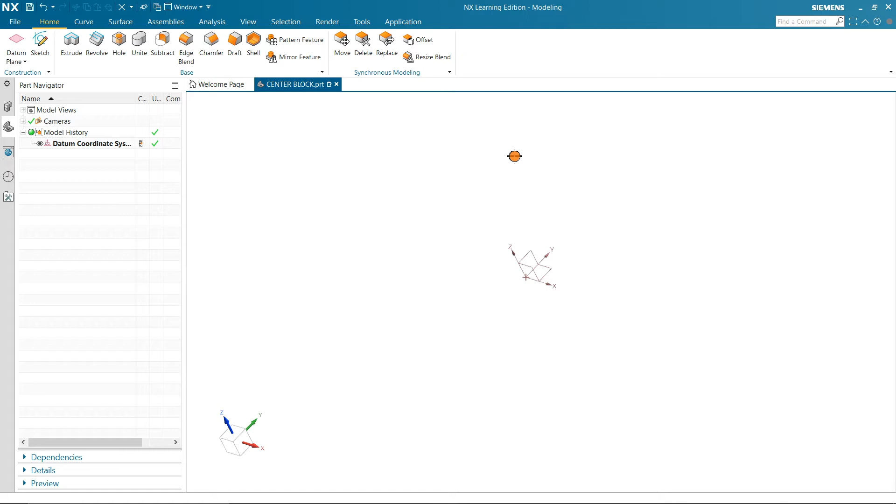Without delay, let's start sketching the center block. Here the dimensions given were 20 mm and 30 mm.

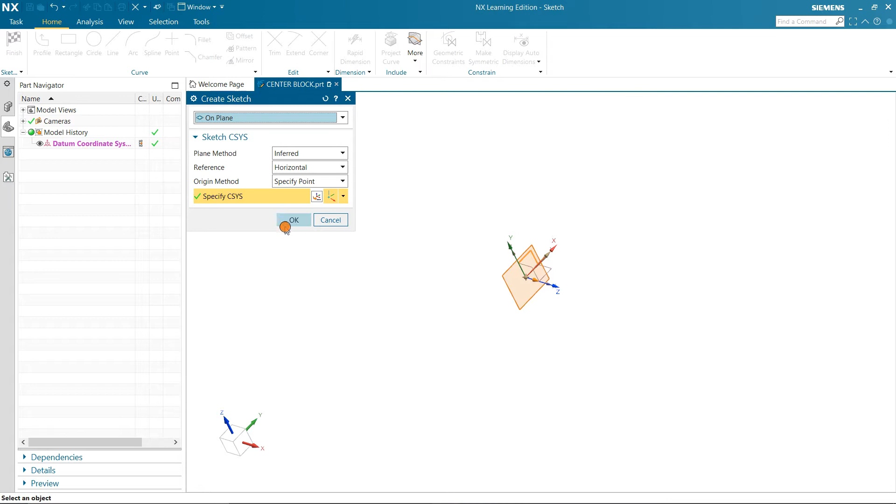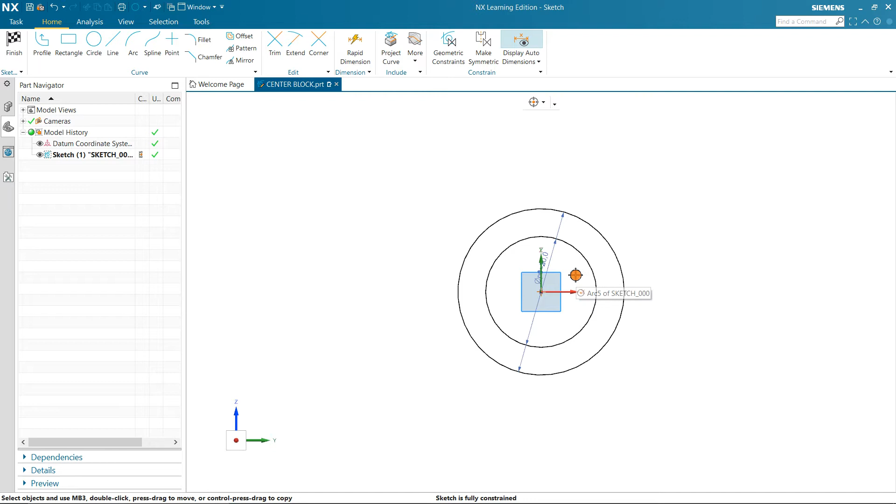Let us select the plane and draw a circle. This was 30, and one more circle, this was 20. Just take care while sketching that your circles might overlap, meaning when you draw the first circle you might have sketched two or three with the same dimension.

Now just extrude that. The extrusion length was 35 mm, and click on apply.

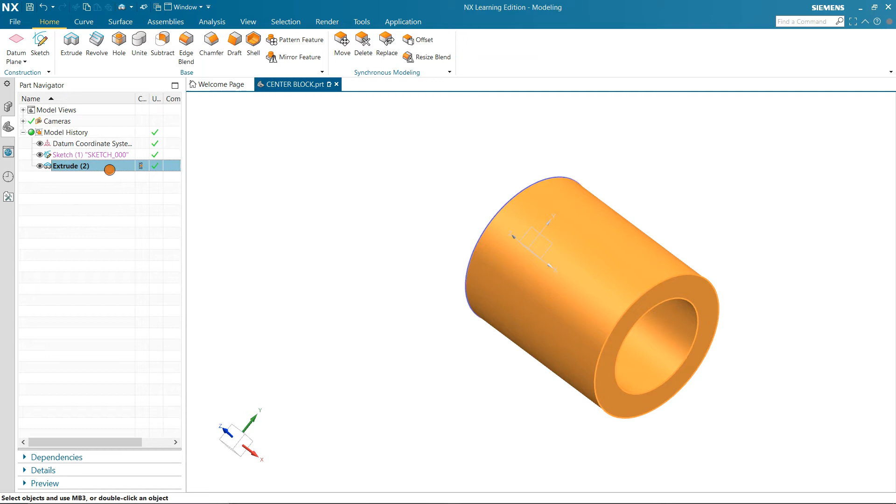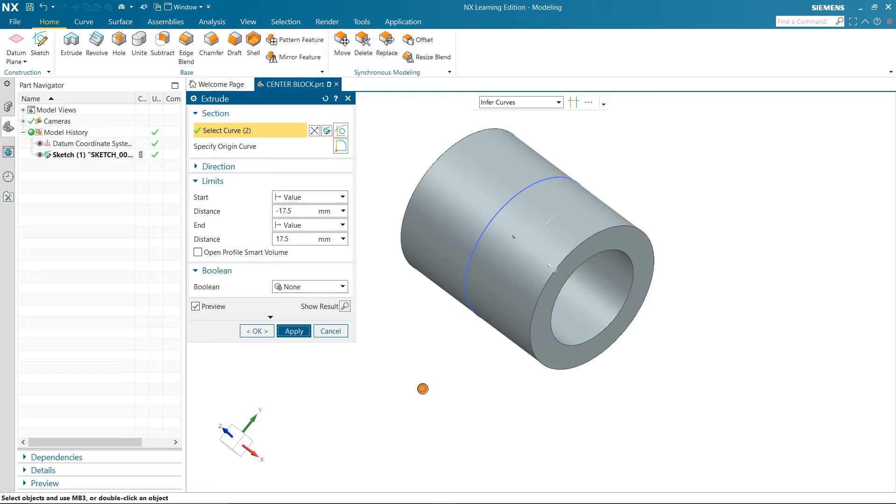I think it will be better if we extrude it in both directions, because we have to sketch on both sides. So let's first delete this, and now again extrude, 35 means 17.5 and 17.5 on both sides. I think this will be better because we have to draw one more perpendicular to this, so that's the reason I extruded it symmetrically on both sides.

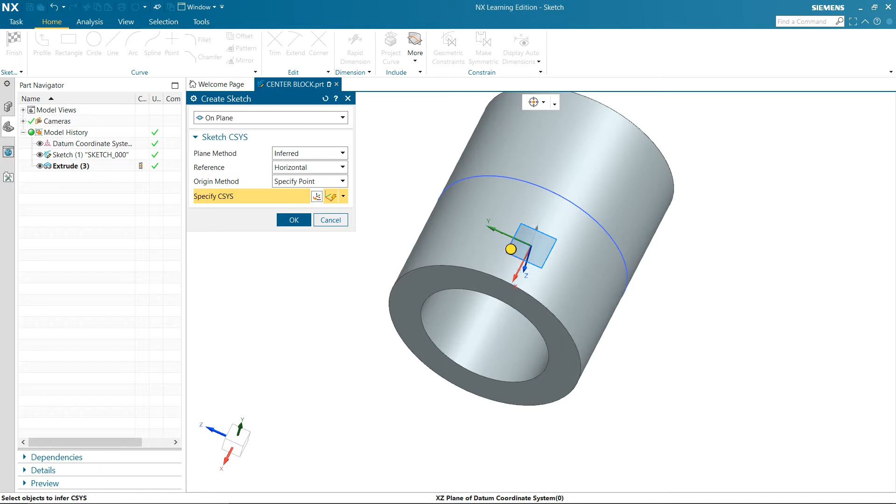Now select a plane perpendicular to this, and I am selecting this plane. Let's click on sketch and select the horizontal plane, then click on OK.

The thing is the same: select circle, one was 30. We have to draw one more circle, that was 20. Now you should take care that this circle should be tangent to this.

So what I am doing is I will go to geometric constraints, select tangent, and select this circle. First let us draw a basic axis line here so that we can make tangency.

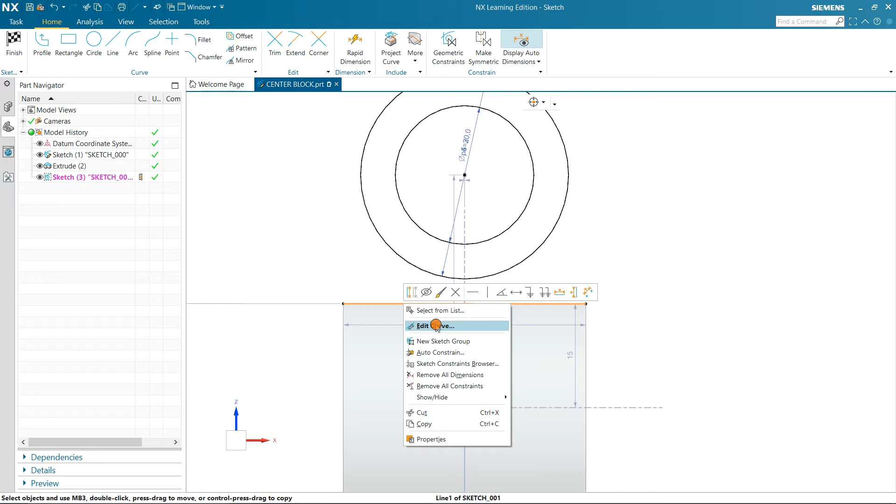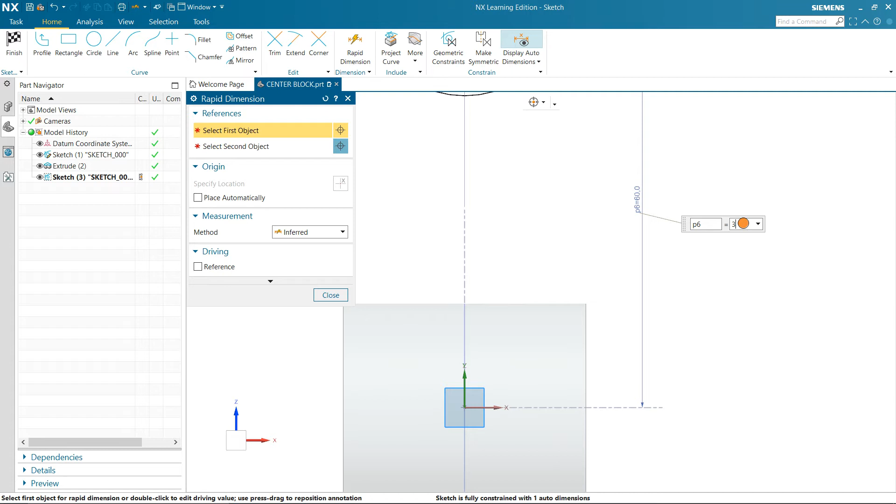Select this line, and rather than converting the axis line, I am just mentioning a dimension here from this line to horizontal. This was 60... wait, that was not 60, it would be 30. So you can see this has become tangent to this, because from here to here the radius was 15, and from here to the center the radius was 15.

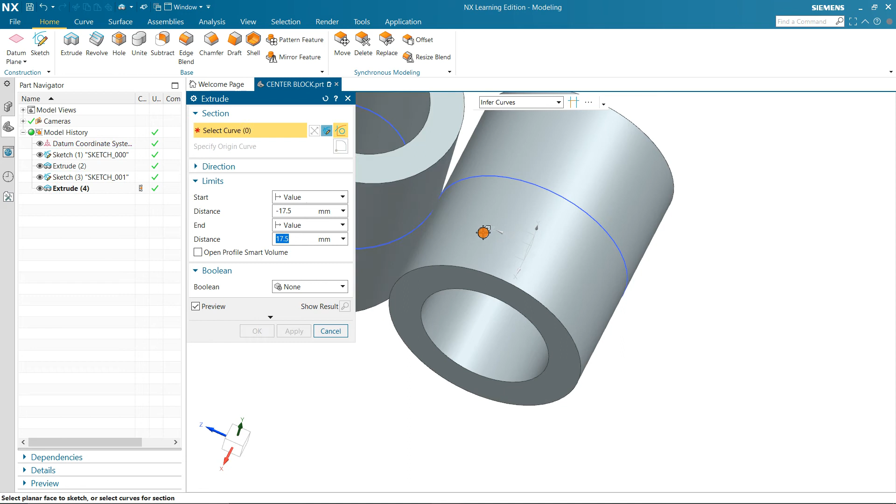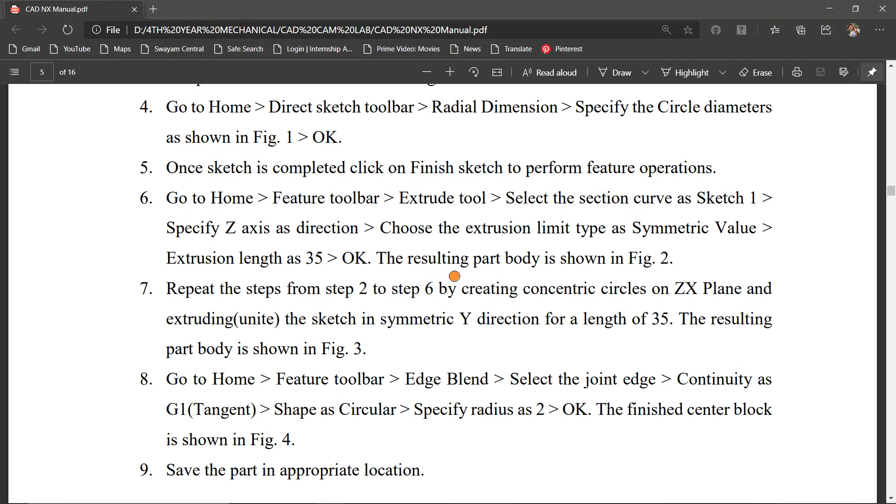Now simply quit your sketch and you can extrude it. I think... okay, repeat the steps by creating concentric circles.

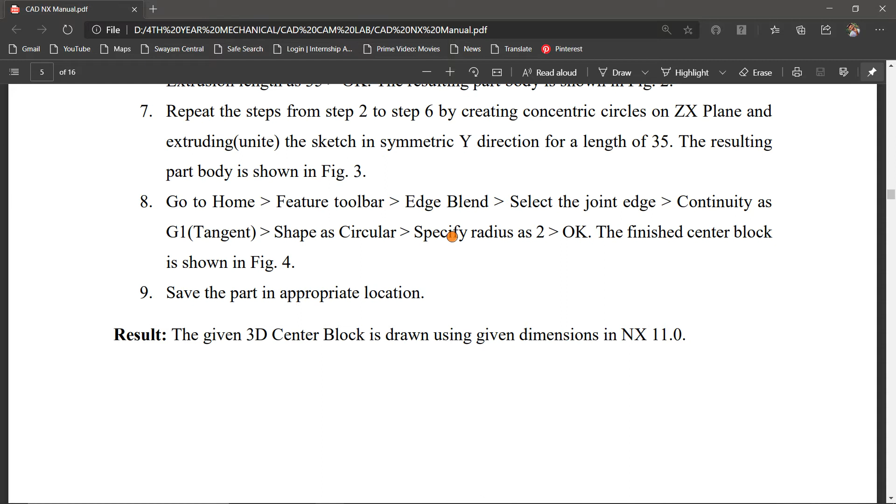I think they both should somewhat intersect so that we can apply fillet there. So let us click on OK.

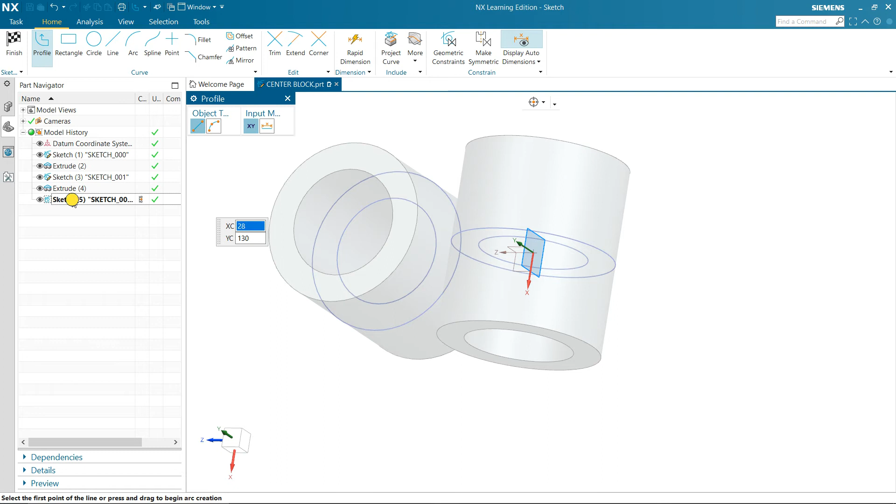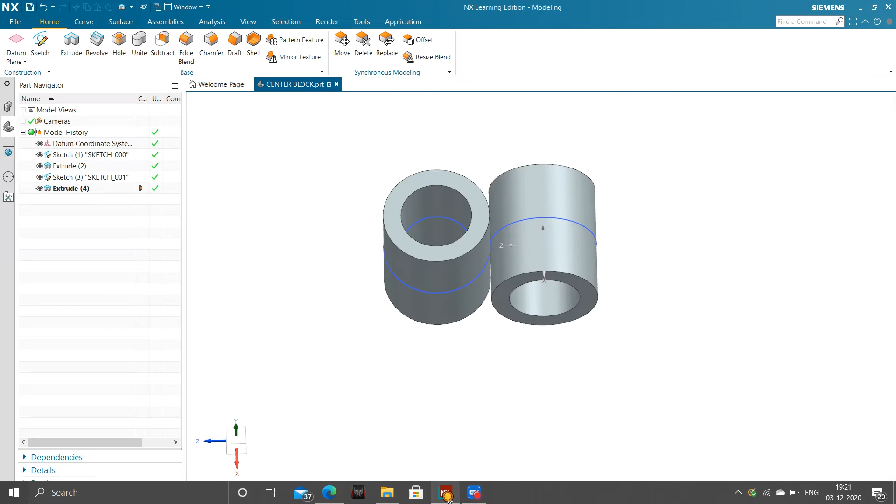Let's just edit here, because there must be a small physical contact between them, and in our data they didn't give the intersection length. So let's roughly edit this sketch 3. I am editing this distance, let it be 28. I think that will be okay.

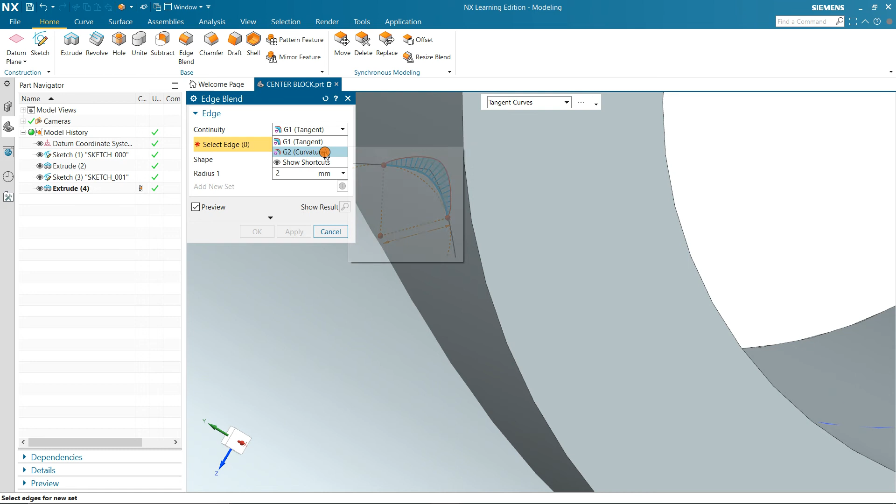The thing we didn't get an edge is because we didn't unite that. So let's again select extrude, select the sketch. In boolean you have to select unite. Before, we had selected none, so there are two separate bodies, that's why we didn't get an edge there. If we select unite, the two bodies will get united and create an edge here. Now click on apply.

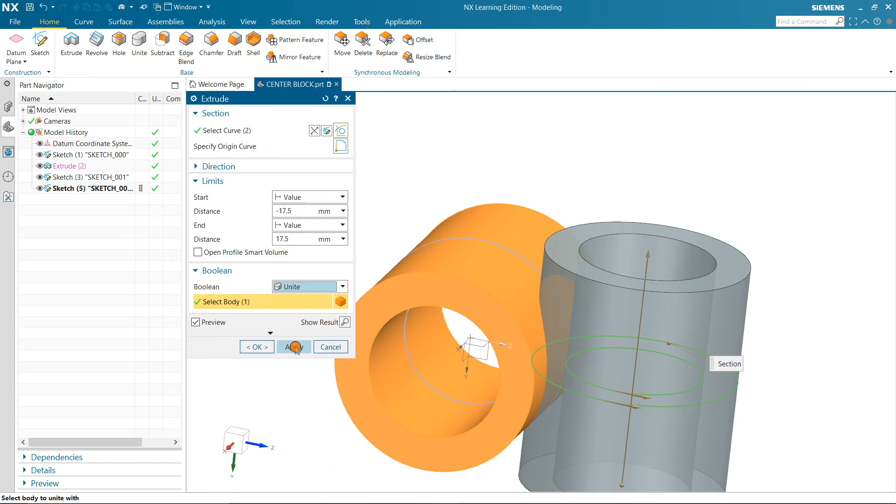Now you can simply select edge blend and specify the radius as 2, then select this edge. Just click on apply. See, the edge fillet is created. Yeah, this is that simple.

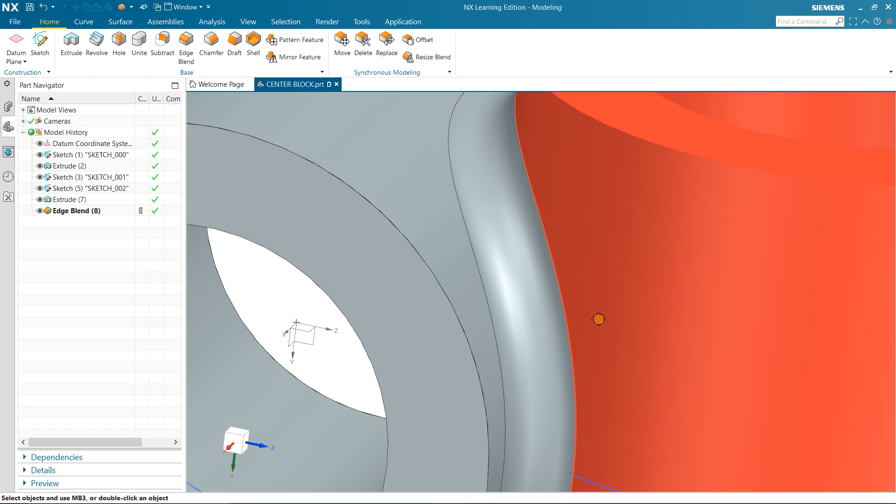Our circular coupling joint, that is the center block joint, is completed successfully.